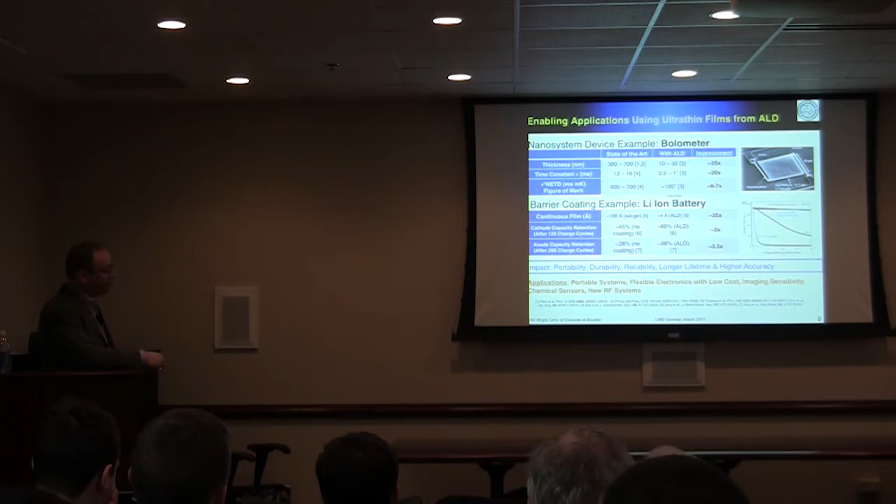So just a brief slide on ALD. People here know what this is, but just a quick review. One nice thing about ALD is it allows a binary sequential reaction, and so in principle, at least in theory, one could build one atomic layer at a time. So you have perfect atomic control in thickness in the vertical direction. An example illustrated here is ALD alumina, which works quite well - theoretically you can get a very precise linear curve of thickness versus the number of reaction cycles.

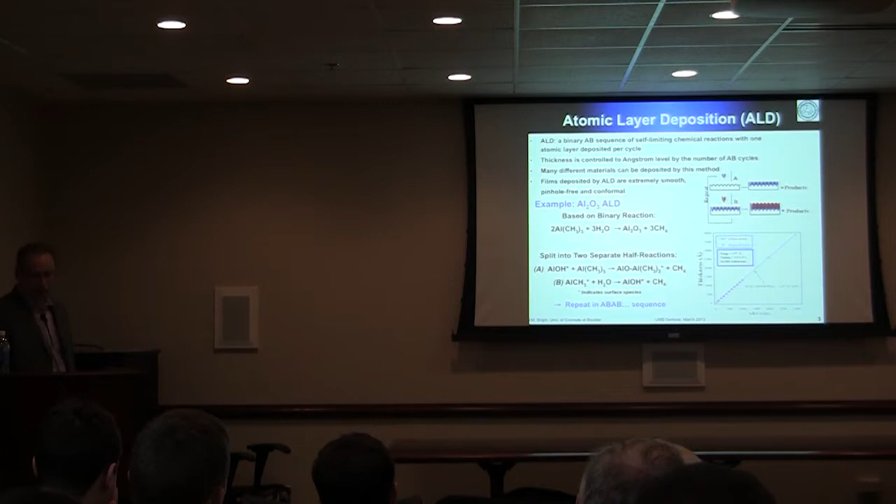Traditionally, ALD has been used as a coating for thickness control, step coverage, conformal deposition, pinhole-free deposition. It's extendable pretty much to any kind of substrate of any size, as long as you have a reactor chamber big enough to handle it. It is compatible with MEMS materials, compatible with released MEMS devices.

What I listed here are the materials we work with at University of Colorado. We collaborate with Professor Steve George in chemistry, who is a well-known faculty member in this technology, atomic layer deposition. These are the materials he has in his lab. He uses mostly custom-made reactors. We do have a Beneq system that we recently installed for larger substrates, but mostly we build custom-made reactors, some of them dedicated to my group specifically for tungsten deposition and aluminum oxide.

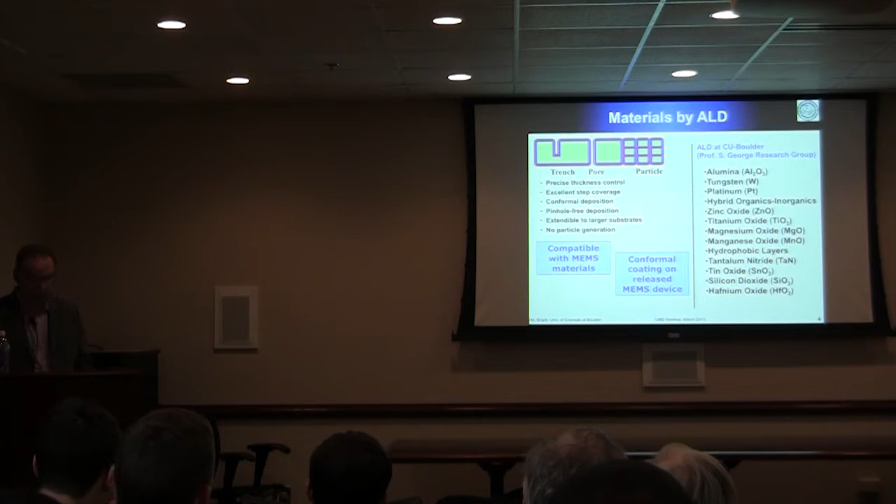First I'd like to talk about more MEMS type structures, and then the second part of the talk is on nanoscale systems. So the topics I'd like to cover, as an overview of what we've been working on: microstructure adhesion, optical applications, wear-resistant coatings, creep control, and combination of organic, inorganic films.

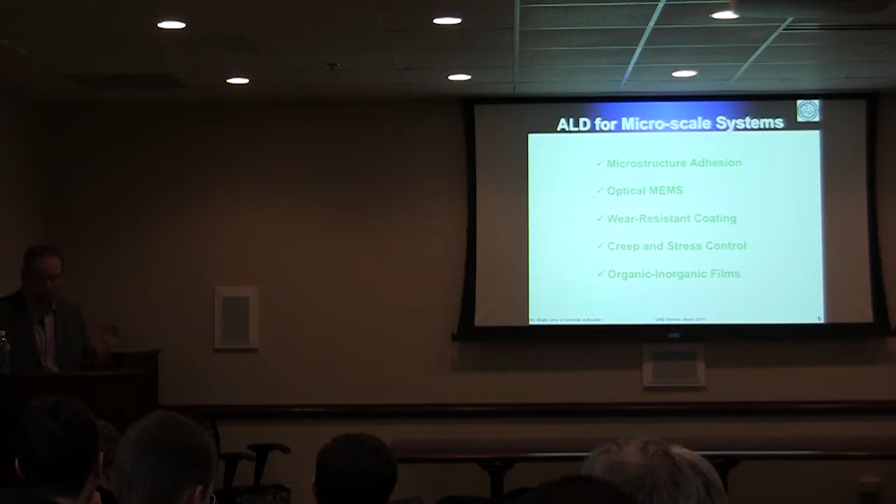So first, the microstructure adhesion. We've been looking at this problem for a long, long time. In fact, the very first work we introduced to the MEMS community on ALD was for this adhesion control application. Adhesion happens due to a combination of three forces: capillary, electrostatic, and van der Waals forces. You can design ALD-type coatings to control pretty much any of those, or a combination. What you see here is sort of a traditional way of looking at beam adhesion - this is a polysilicon suspended beam.

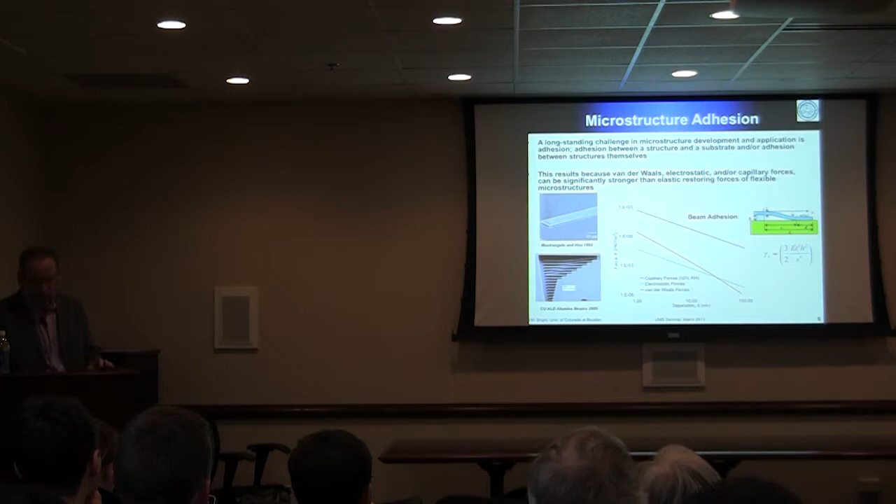You can measure the adhesion of the beam relative to the substrate, the length of the adhesion, and based on this equation, one can determine the adhesion energy. It doesn't tell you which force is involved, but at least it gives you adhesion energy. So using this, one can actually study how different films would behave.

Here's an example of hydrophobic ALD coating that we did a while ago. This is DMA-based coating. The picture on top is the coating on aluminum oxide, and you can see the contact angle of 97 degrees of the water droplet. Functionalized coating like that can give you better contact angle, something over 100.

Here's an example of interferometric measurement of an array of polysilicon beams coated with this hydrophobic coating. So here's an array of beams, same beams as shown right here. You can see these beams here all adhere to the substrate due to stiction. All of these beams are freestanding. So you can work on that direction of hydrophobic coatings.

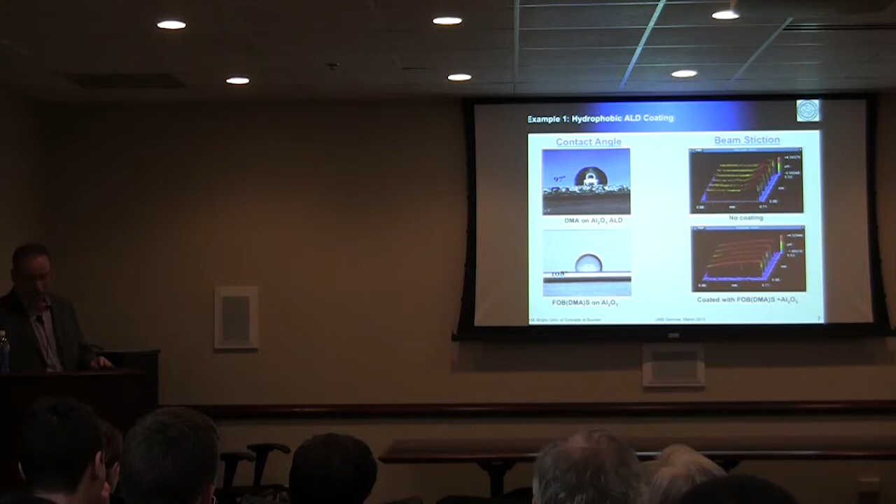But also one can work on dielectric or conducting coatings to control charge between the surfaces. Here is an example of an old device. This is a polysilicon beam made from MUMPs process, with two examples of ALD-type coatings: one aluminum oxide and one zinc oxide, both by ALD. If you look at the cross-section of this beam, you can clearly see the coatings, so it's a conformal process.

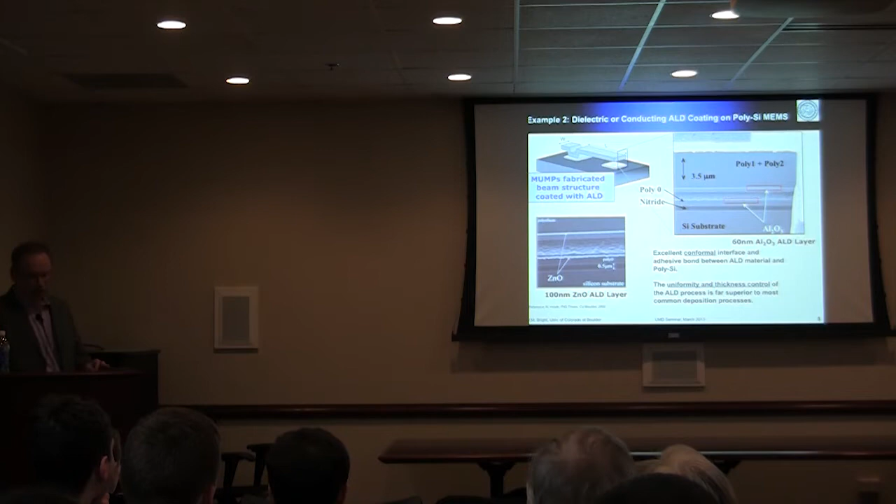Aluminum oxide here is used as a dielectric coating. Zinc oxide is more of a conductive coating. But what's interesting is actually when you combine zinc oxide and aluminum oxide.

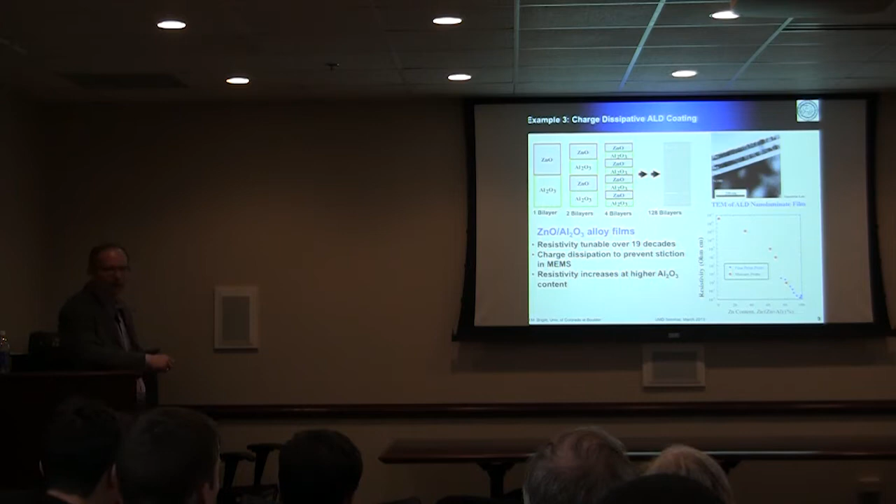You can make a super lattice. This is all done in the same reactor, actually. You can grow this kind of structure, a coating layer of alumina, zinc oxide, alumina, zinc oxide, and so on. Depending on the thickness of individual layers and overall composition, you can actually control resistivity or conductivity depending on how much zinc you have in a composite. It's very interesting because this one is actually tunable over 19 orders of magnitude of conductivity. So you can make a coating that actually bleeds out electrical charges, which would be an interesting application.

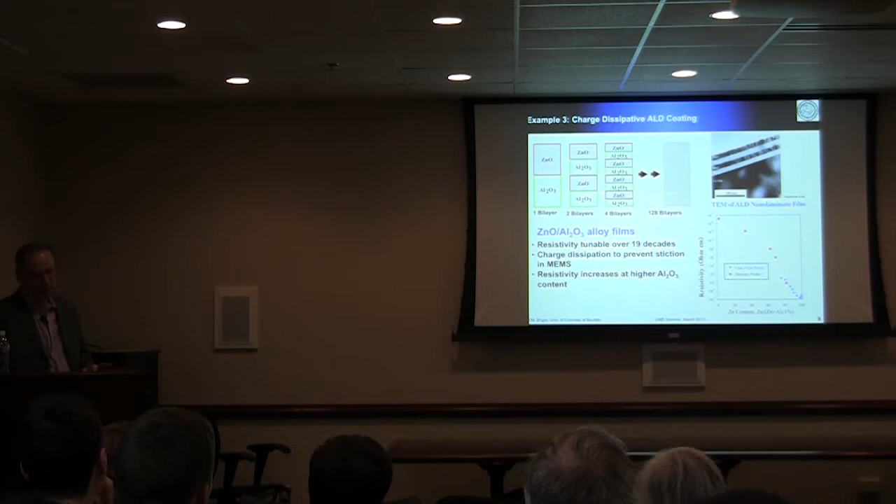Also similar concept, aluminum oxide tungsten type coatings for wear resistant coatings. This is work done with Sandia. A while ago, they used to make these micro machines, and that grind silicon and silicon basically wear themselves out. So you can coat it with ALD material and have an improved lifetime of the device.

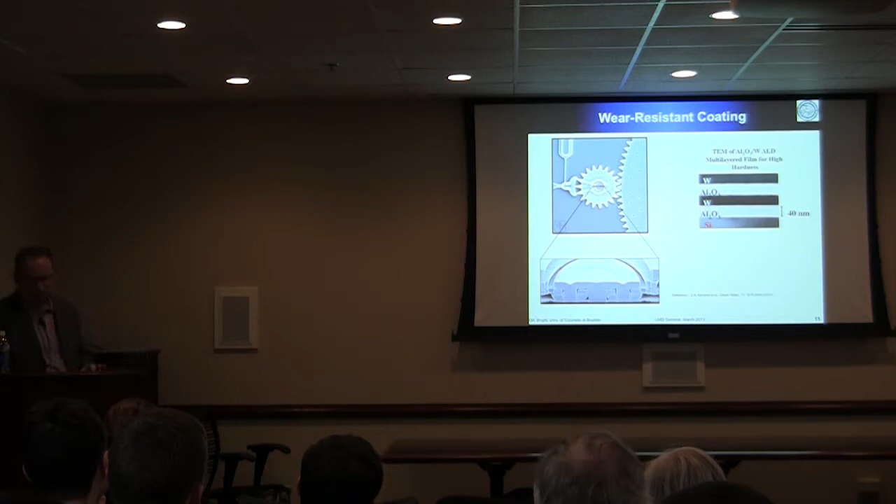Now, one interesting application of this coating is also for creep control, stress control, relaxation in films. Here is an example of a classical polysilicon beam coated with gold. Over time, the residual stresses are such that the beam curvature will change. If you coat it with ALD, encapsulated with this hard shell aluminum oxide, you can pretty much find a way to control this over time. This is important for many applications.

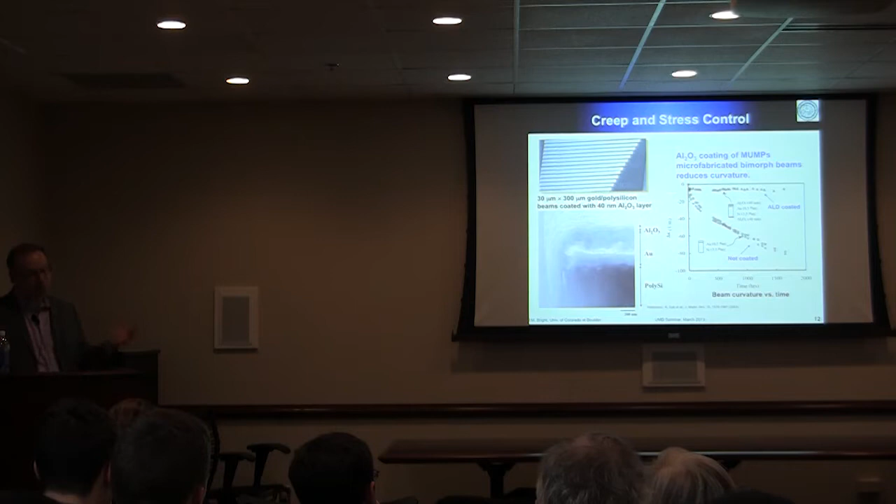Here is a corner of this polysilicon beam just to show conformality. It's an important problem, one that people typically don't talk about, but it's there. So you need to figure out how to control it.

So that's inorganic coatings. One thing about inorganic coatings is that they are hard and brittle, but they're high modulus and high refractive index. The other side of ALD is what's called molecular layer deposition, or MLD. MLD produces organic coatings, which would be soft and flexible and low modulus. That would be a different application, but then you can also mix the two and actually tune the mechanical properties of the composite.

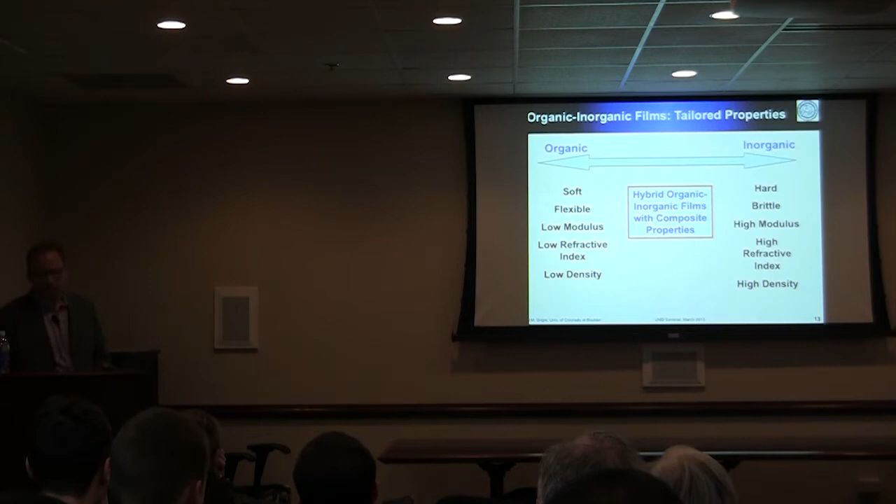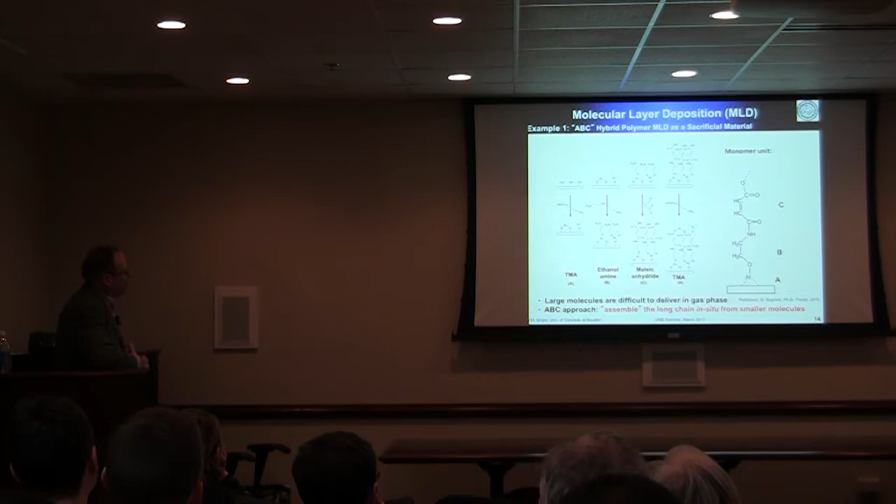Earlier examples of MLD coatings that we've been working on are the coating called alucone, or metalcone in general - you can use different metals other than aluminum. This is an organic molecule reaction called an ABC reaction rather than just A and B reaction, based on ethanol amine. This ABC system is also quite controllable. If you look at the measurement, it's linear growth with time. The nice thing about it is, again, a very low temperature deposition process.

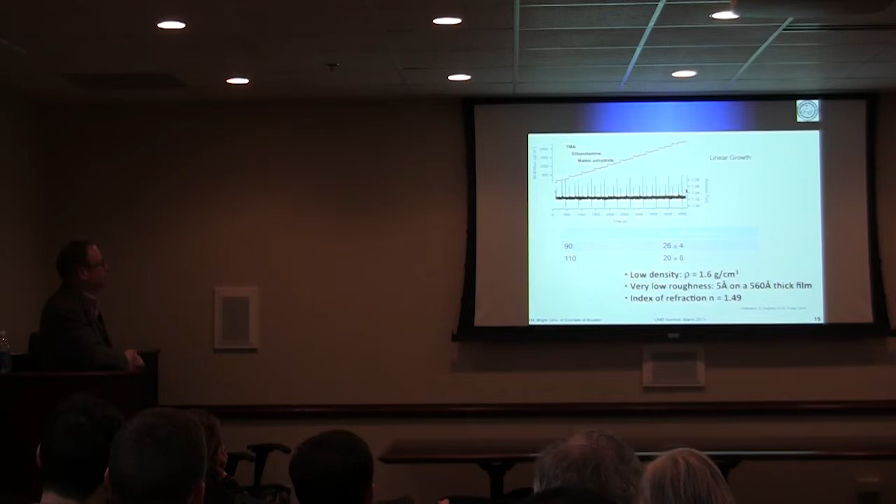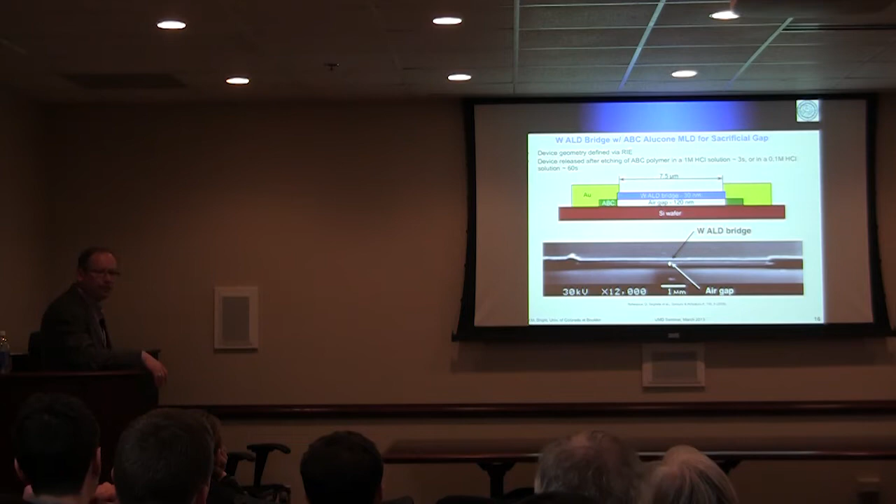But it does produce coatings at a low density, low roughness. The first application of this was using this as a sacrificial layer for making nanostructures. What you see here is a very simple structure, a tungsten beam suspended, done by ALD. And this air gap was actually the alucone MLD coating, which was removed in hydrochloric solution.

Once you realize you can make this type of technology, you can create a custom-made surface micromachining process in-house that uses ALD for structural layers, not just coatings. And because you can make removable layers that are precisely controlled in thickness, you can make very, very small gaps.

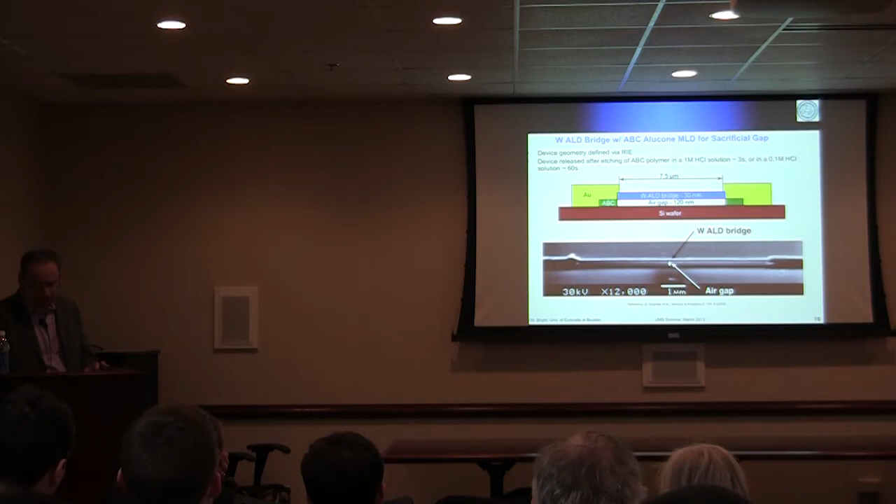This one was done with MLD, alucone. The other application of this is to make a flexible coating multi-layer. This is a lattice structure. What you see here is alumina, ALD, polymer MLD, alumina, polymer ALD. An example of this on PEN substrate is shown here: alumina, MLD, alucone, alumina, and this metal was used here for the conductor.

The nice thing about this, again, is you have a composite. Depending on the individual thicknesses of these layers, you can create something that has the mechanical properties you're looking for. It could be a flexible, tough coating, could provide superior gas barrier diffusion, could be transparent interconnects, and so on.

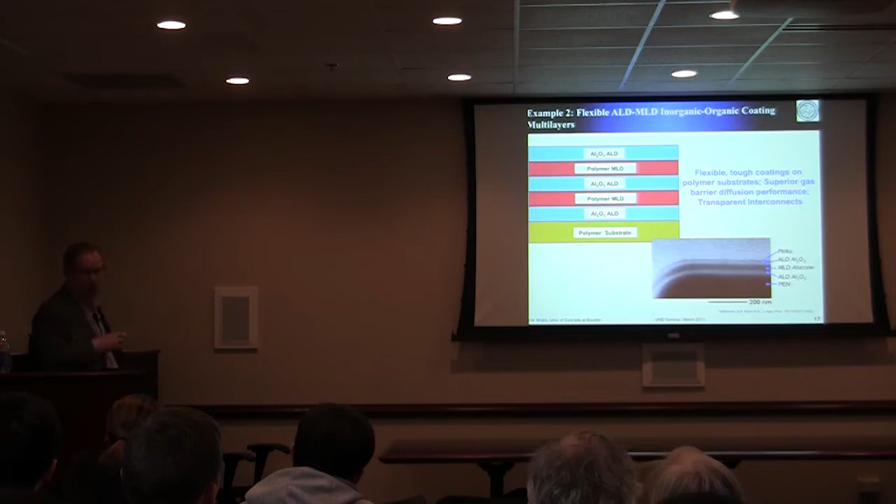Speaking of transparent interconnects, more recent work from CU Boulder would be zinc oxide or zinc-based MLD based on diethylzinc. With this type of material, you produce something instead of alucone—we could produce something called zincone. Once you mix zincone with zinc oxide ALD, depending on the ratio of the two, one can actually tune the electrical properties of the coating.

It is a transparent coating. It's a flexible coating. And the idea behind this research is to find a replacement for ITO, for transparent electrodes.

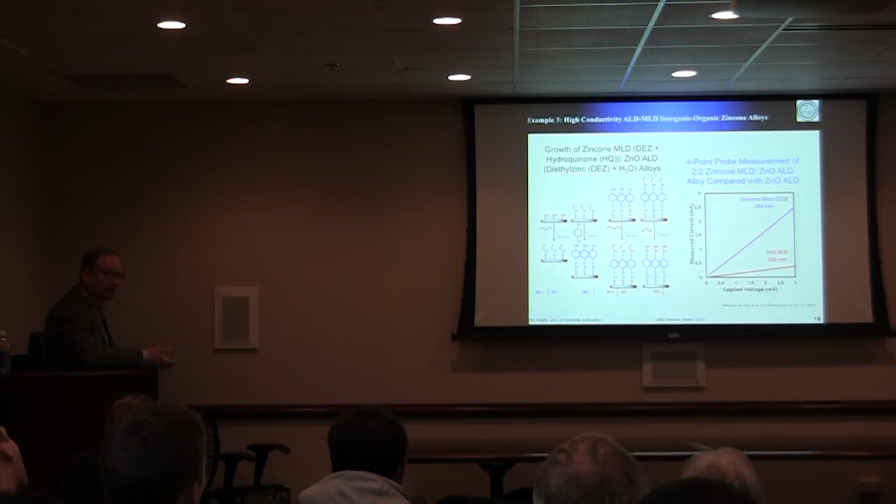So here is more on the same topic. The best coating that we get is this one right here, the 2-to-2 ratio. You can see it's an order of magnitude off relative to ITO performance, but it's still pretty good. It's a transparent, tough coating, and pretty easy to deposit and pattern into electrodes. So we are looking into this right now for flexible coatings.

Now, the other thing with this type of coating is you can tune the mechanical properties. What you're seeing here is an example of aluminum oxide ALD and alucone MLD. Depending on how many layers and the thicknesses you have in the composite, you can actually tune the mechanical properties as a function of the ratio of the two materials. Here is an example of the Young's modulus and the hardness, done through nano-indentation loading to extract the mechanical properties.

Moving on to nanosystems, what I'd like to cover is sort of a mechanical properties issue and freestanding nanostructures, and then some examples on carbon nanotube transistor work that we did, and nanowire work.

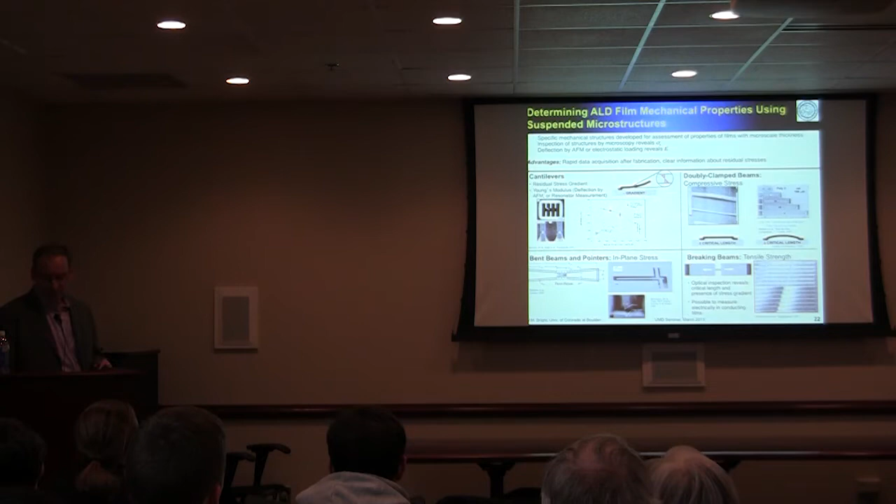Here is an example of where the mechanical properties matter. Let's start in this corner right here: an example of critical tensile strain versus aluminum oxide film thickness. You can see that the thinner the film gets, the higher the critical strain, which is something you would expect. But still, how to model that at this nanoscale, we don't know. There are some ideas, some models we could apply, but this is not a well-understood problem.

But here is more of a nanoscale or MEMS type of structure. If we take a structure like this, and let's say we just want to make something flat on a post—here is where we started. It's a stack of aluminum oxide, tungsten, aluminum oxide, and it's a mirror, a very thin structure.

Tungsten is in the middle. The reason why we use aluminum oxide on both sides is to prevent tungsten from oxidizing.

But here is the problem: we don't know the properties of individual films. And so to go from something like this to something that looks like this, which is the same device, it only took about 80 hours of clean room work.

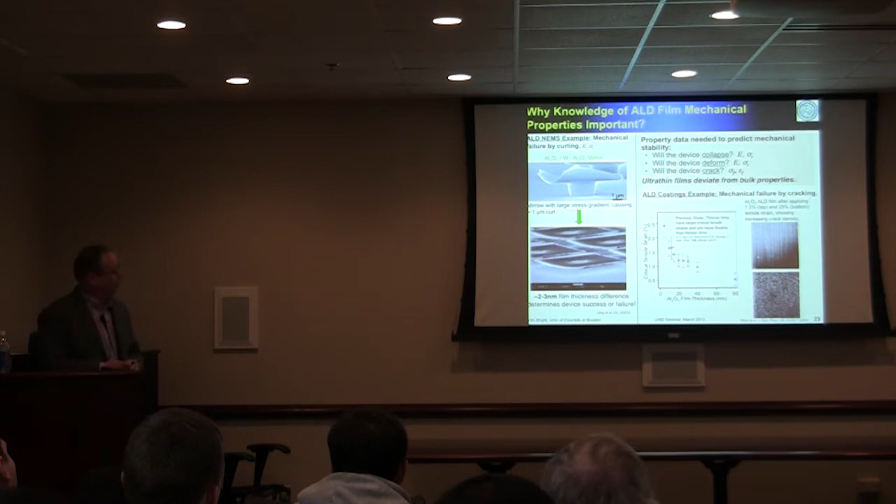And they are a function of film growth conditions, temperature, and rate. They also turn out to be a function of whatever the underlying substrate you were using before. So that's one issue that really needs to be worked on.

Now, as far as examples of freestanding structures, here's an example of some work on a deformable micromirror device. This device itself is an ALD membrane, metallized, to make a deformable mirror. It's made on one substrate, and then it's flip chip transferred to another substrate above a set of electrodes. This one actually had sort of circular type electrodes.

There are 5 of them. Depending on how the voltage is applied on individual electrodes, you can see the interference patterns of this device.

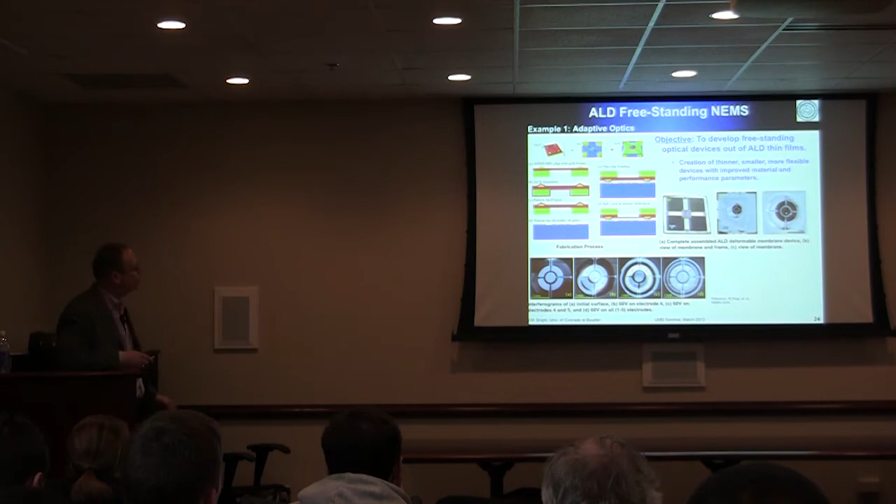Probably this one was the smallest pressure sensor we've ever made. This one is a very small diameter device. Here's the diameter of this, in the order of 100 microns. This device was done in collaboration with ETH Zurich group, Christofer Hierold's group.

And what we did here, we used the ALD to make a membrane, and we used single wall carbon nanotube as a piezoresistive sensor on top of the membrane. So as the membrane deflects, it pulls on the nanotube and its properties change, piezoresistive properties.

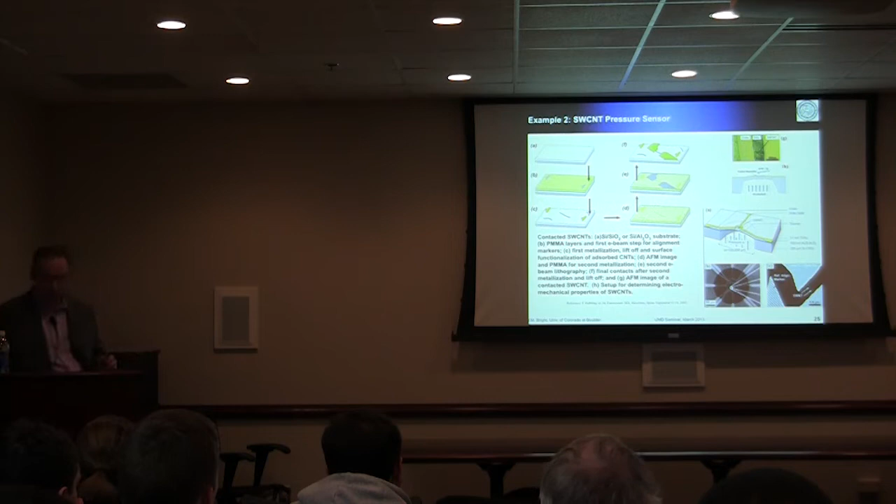Some of the work on resonators: once you start making free suspended structures, you can easily make suspended beams and bridges that could be brought into resonance and make sensor-based devices like that, based on resonance. This one here is done with aluminum oxide.

You can go and make nanoscale switches once you know how to make gaps. So again, everything here is made by ALD. This is a tungsten-based device. Here's a tungsten ALD switch, cantilever here, 1.3 micron long.

The air gap was created by MLD. This device here is a 2-terminal device, and this one is a 3-terminal device. It's a mechanical transistor. So, Victor, what are some of the advantages in the quality factor that you get out of this?

A quality factor for the resonator? Yes. In comparison to other processes.

The main advantage you get with ALD is you get ultra smooth surface. So you get very, very low energy loss in the surface, because, well, I know Gary would disagree with me, but in principle, you get atomic scale control in thickness. The Q is very, very high.

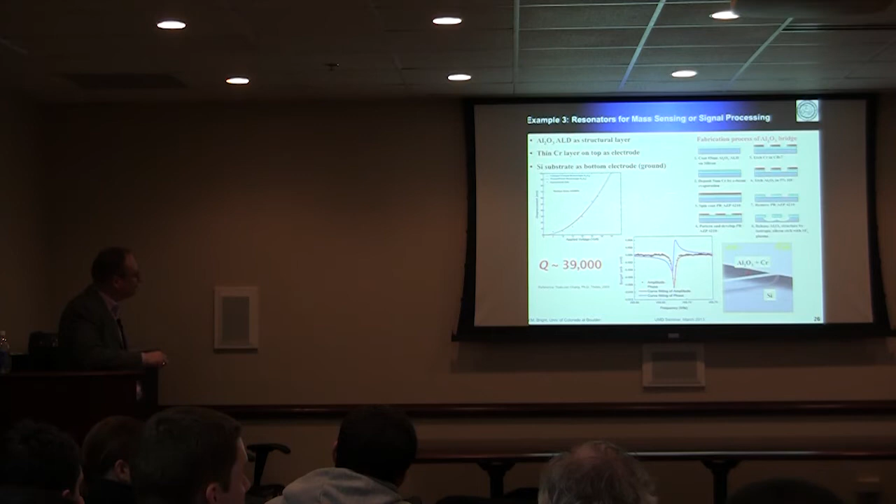And your gaps, for the same reason, are precisely defined. So electrostatic gaps, for example.

Some of the work on carbon nanotubes, or ALD for nanomaterials. We've done some work on coating the nanotubes with successive ALD films, and of course at this scale, surface is everything.

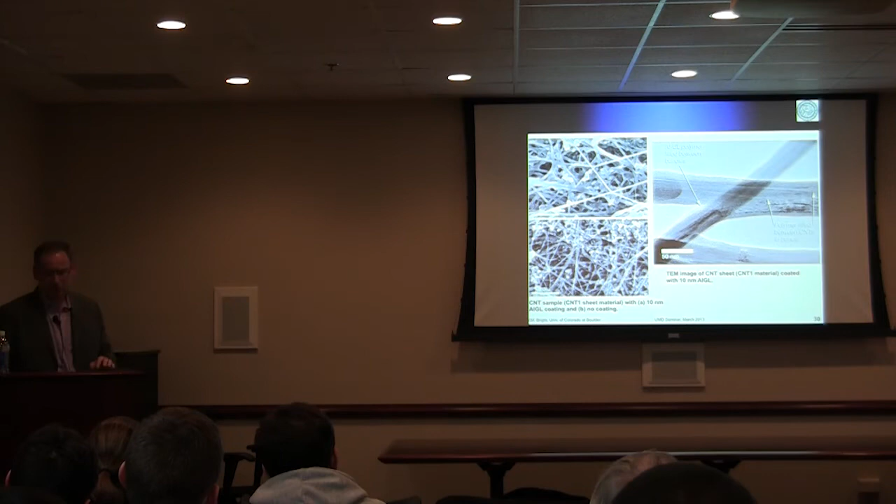So one thing we've been looking at for ALD for carbon nanotube devices is this carbon nanotube transistor. Again, this work is a collaboration with the ETH group. What we've done here is very simple. In fact, the contacts in the carbon nanotube transistor degrade pretty quickly over time.

The other example I wanted to bring up is the nanomechanical resonator. We've done quite a bit of work over the years with the NIST Boulder group. They do MBE growth of gallium nitride nanowires. Their interest has been in LEDs and photonics applications for this type of nanowire, and we've been working with them in that direction as well, but we also looked at individual nanowires as mechanical resonators.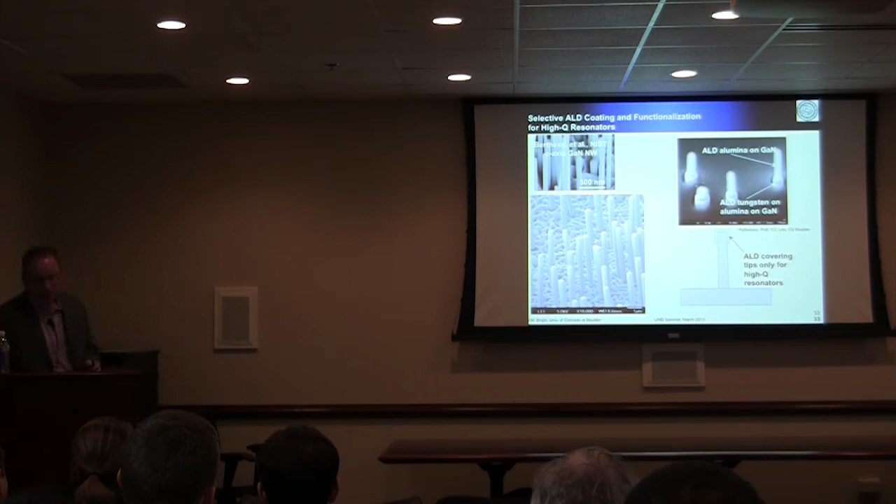So to give you a quick summary of what we've been working on: electrical conductivity is an obvious thing here, controlling resistivity to avoid charge accumulation, isolation, improvement, interconnects. Mechanical properties are becoming a major problem for my group. As we move more and more towards nano applications, we are developing a reliable way of extracting mechanical properties of this type of film.

Inorganic-polymer type of composites—this is a very promising application for a lot of stuff we're trying to do, especially as we move to flexible substrates.

Nanomaterial coatings and contacts, again for gallium nitride nanowires or any type of nanotube structures. Then nano-scale freestanding transducers—this is a very interesting one, with only a few examples so far, like switches, resonators, or bolometers. It would be interesting to see what people come up with at that scale. Obviously optics benefit significantly, but you have to be at the right wavelengths for this to happen.

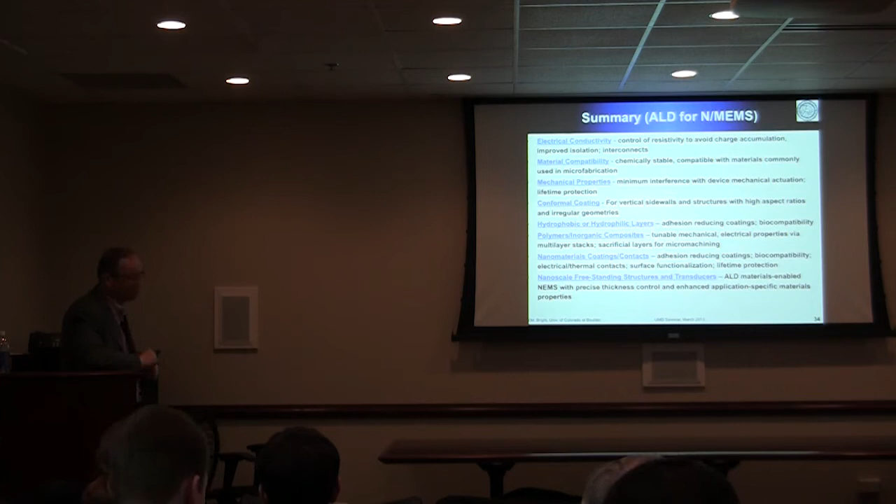So with that, maybe acknowledgments. Professor Stephen George has been my collaborator for the past 12 years in this field. Without him, ALD probably wouldn't be happening in my group—we'd buy commercial reactors and be very limited. It's nice to have somebody next door who can build whatever reactor you want for whatever chemistry. And if it blows up, he takes the blame.

My students—there's probably a dozen or so who contributed to this slide, and all the work I've shown has come from DARPA support. We had a center called IMINT that was around for 5 or 6 years and provided a lot of support. The pictures on top are Boulder Creek, our major river, summertime and wintertime, same shot. So, all right, thank you.

Questions, please. A couple—do you ever look for texture in the ALD films, or is there an application you think about for the other one? For battery use, is it production or research, and at which stage is it at?

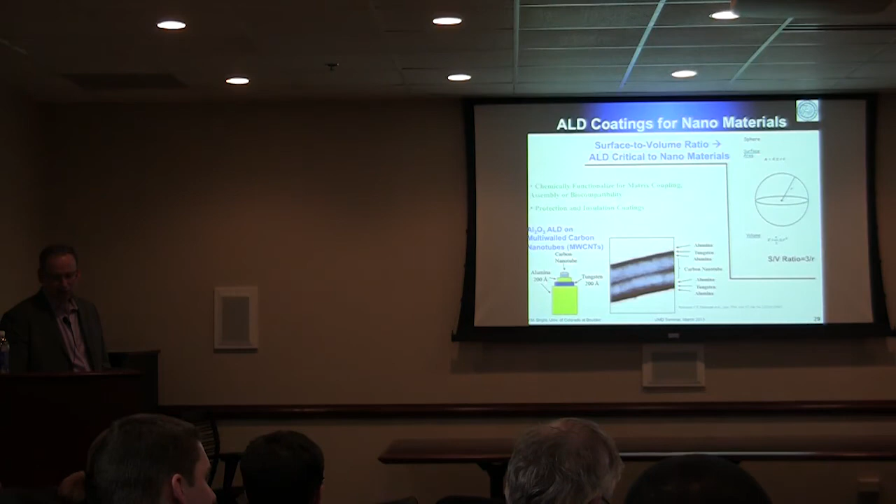So can you elaborate a bit more on these freestanding structures and areas we haven't yet explored using the ALD process? Where do you think the field would be going by using this technology, especially structures that are out of plane and applications that will require this? So the bolometer is actually an excellent example that uniquely benefits from ALD film because of the thermal isolation. I think there's a huge field in optics for freestanding films like that, because you have unique thickness control. The question is how to do lateral control other than just E-beam.

My understanding is there is a way you can do ALD control laterally. People have demonstrated this, with a few papers published on laser control of ALD. You activate the substrate at specific locations, instead of doing vertical control with uniform blanketing, so you only grow the film where needed and don't have to do post-lithography. So it's selective ALD. Whether you do that with nano-scale nozzles or with lasers, I think that would allow unique fabrication capability for making nanoscale gratings and structures. It's not necessarily that you can make really robust suspended devices, but gap control is very critical, and certainly the MEMS field benefits from that, as well as maybe optics.

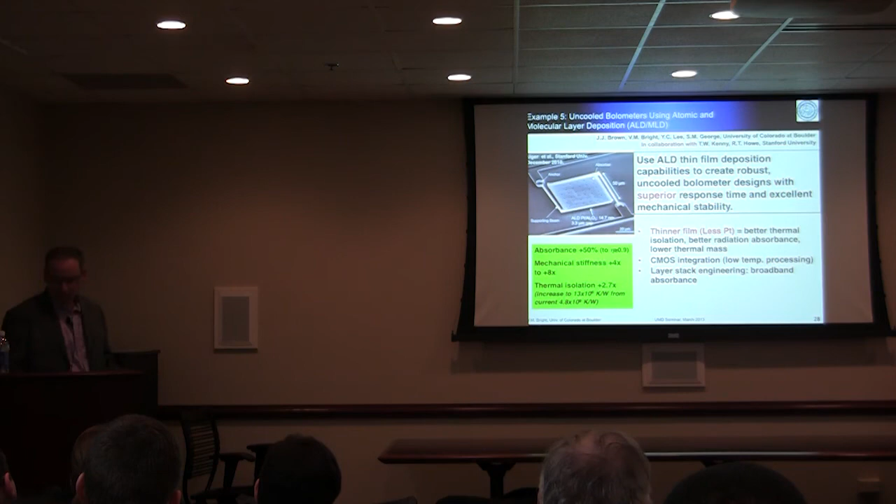This Q factor, 50,000 on the cantilever, is very nice. Do you know the Q factor on those nanowire resonators you presented on the last couple of slides? Let's see, I'm trying to remember what the Q was. No, that's not gallium nitride - the gallium nitride ones should be. Is this correct, 10,000 to 100,000? Yes, that is actually correct.

On these nano-scale resonators, the cantilevers are horribly damped in viscous solutions. Do you know how badly the Q factor suffers in viscous conditions for these devices? Is this something you absolutely must do in a vacuum? These are done in vacuum, these are measured in vacuum. I wouldn't know what they would look like in ambient conditions.

100,000 is not that unusual for this type of device. This is single crystal gallium nitride. The nice thing about this process is they're grown by MBE, so they are defect-free. They're C-axis, so they're pretty high quality to begin with. The other nice thing about gallium nitride is it really doesn't oxidize and doesn't contaminate, so you can make very nice devices with this type of nanowire.